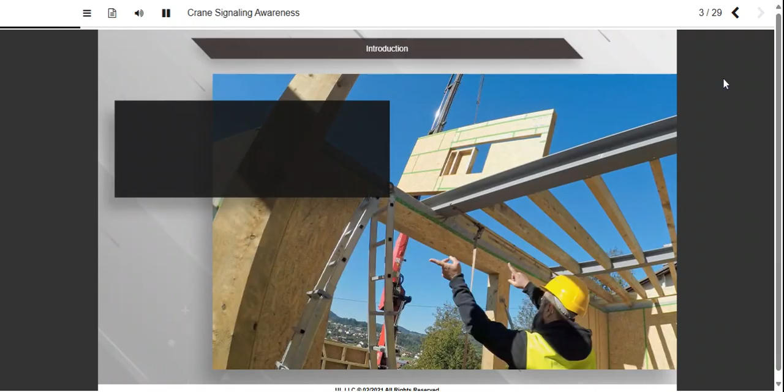Welcome to our course about crane signaling. Since you work around cranes, it's important that you know who crane signalers are, what they do, and why they are important to the safety of your worksite.

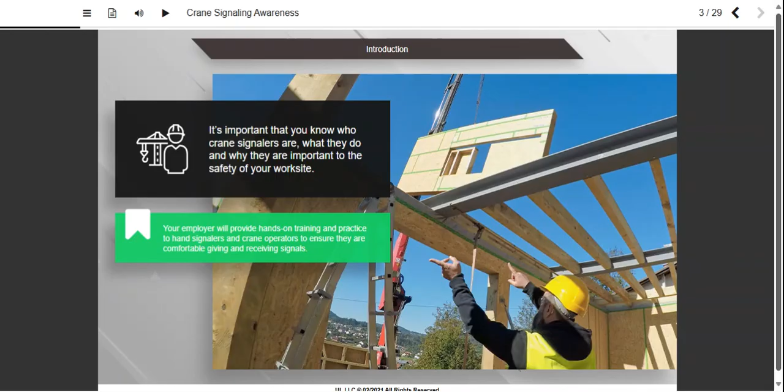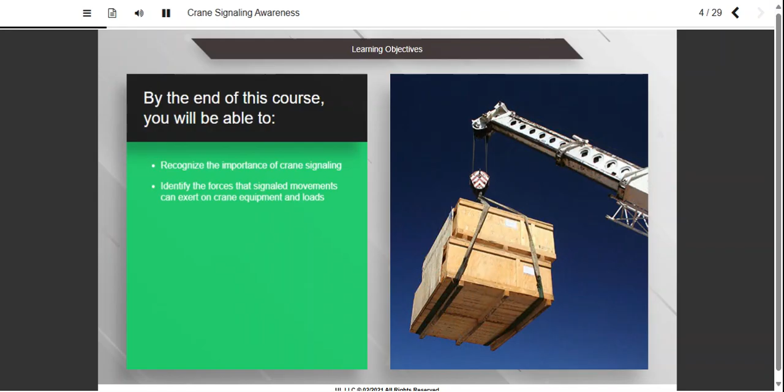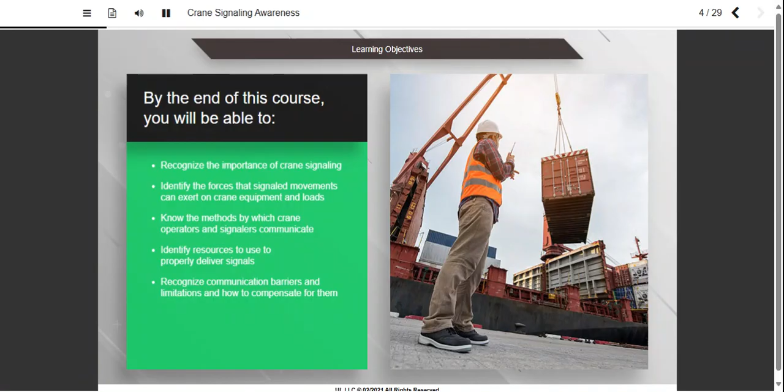By the end of this course, you will be able to recognize the importance of crane signaling, identify the forces that signaled movements can exert on crane equipment and loads, know the methods by which crane operators and signalers communicate, identify resources to use to properly deliver signals, recognize communication barriers and limitations and how to compensate for them, know all official signals for stop work, and know what to do if crane communication is unclear.

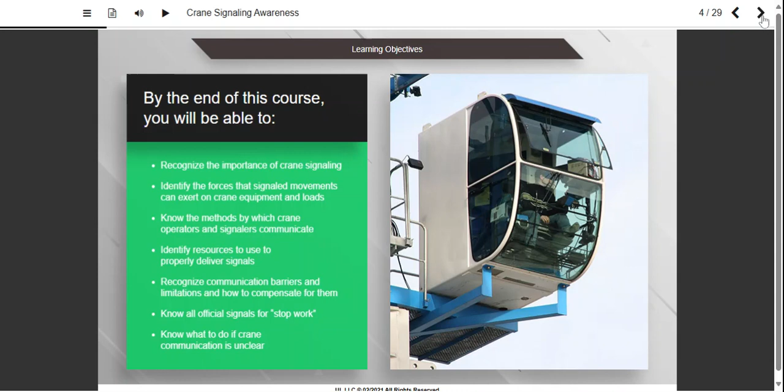Several people share responsibility for safe crane operation. The person directing lifting operations is the person ultimately responsible for the crane's work. This person is usually a supervisor, but may be the crane operator or signal person in some situations. You may hear people refer to this person as the lift director.

The crane operator is the person who manipulates the controls of the crane. The signal person guides crane movements using hand or voice signals. Only one person should give signals to a crane at a time. The exception is the emergency stop signal, which anyone on the site may give at any time.

There are things below, above, and around the crane that its operator may not be able to see as clearly as the signal person can. Crane signalers help crane operators set loads with precision while avoiding obstructions like buildings and overhead power lines. It's important to note that if the crane's boom contacts a structure or load, the boom can be damaged. A qualified person must inspect the boom prior to any additional work. This can be a life and death situation.

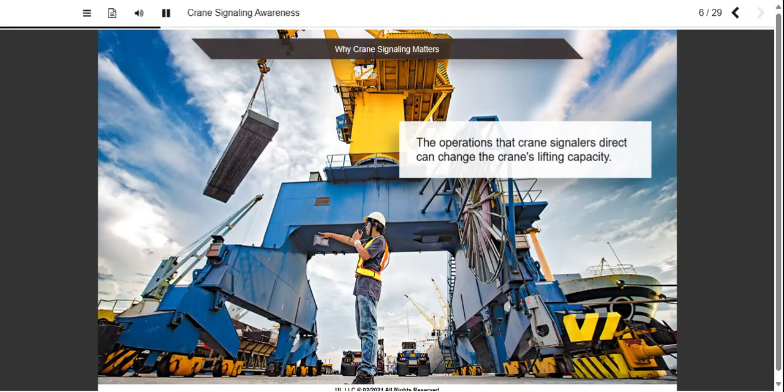The operations that crane signalers direct, such as boom length and radius, can affect crane capacity. Crane signalers receive important training about these effects so that they make safe choices. The lift director, crane operator, and crane signaler all work together to make sure people and property are safe during crane operations. Operating a crane safely truly is a team effort. The team should avoid distractions, such as chatting with other workers, and focus on the crane, load, and surroundings.

Who is responsible for making sure that a crane does not contact obstructions during its operation?

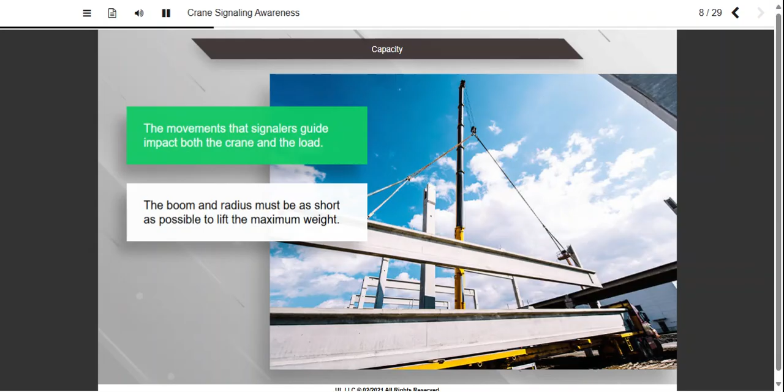The movements that signalers guide impact both the crane and the load. Crane capacity is influenced by the position, boom length, and radius. The boom and radius must be as short as possible to lift the maximum weight. Changing the crane position and extending the boom length or radius will decrease the capacity of the crane. For this reason, cranes are seldom able to lift their maximum capacity.

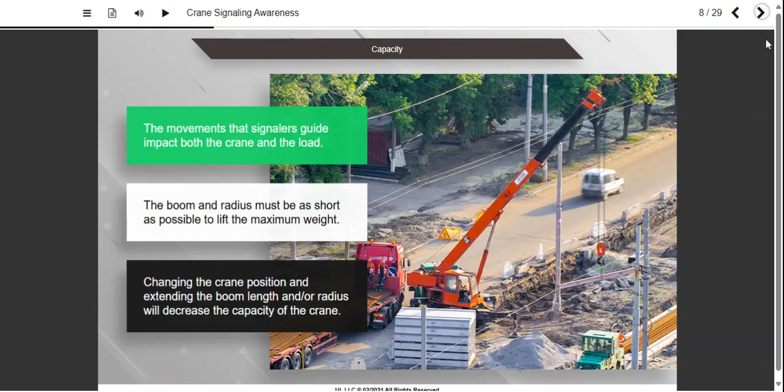Moving a load increases the force and burden on a crane. Dynamic loading is how we describe the effect the speed and weight of a load has on the time it takes to stop it. Heavy loads moving quickly take more time to stop than light loads that are moving slowly. The heavier or faster the load, the more time signalers need to give operators to bring the load to a stop. In other words, signalers must give advance notice so that operators may stop loads gradually and safely.

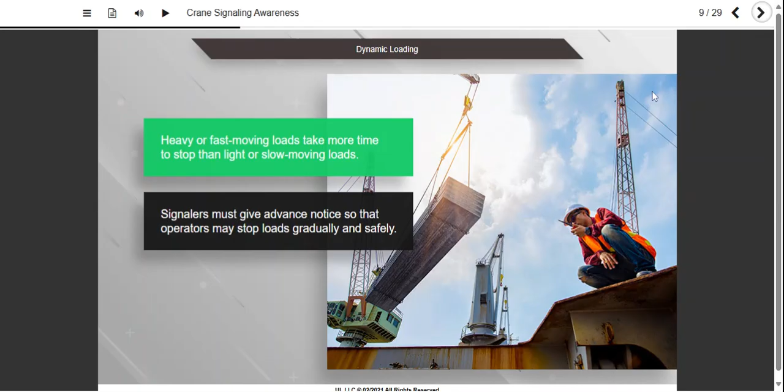If two loads are moving in the same way and at the same speed, which one will take longer to stop?

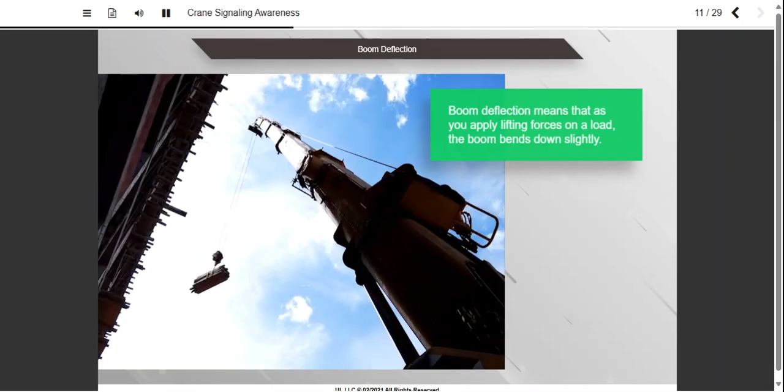Boom deflection simply means that as you apply lifting forces on a load, the boom bends down slightly. So signal people need to account for the fact that the load won't leave the ground as soon as the crane starts to lift. The rigging must become pulled tight, and the boom must deflect completely before the load leaves the ground. When lowering the load, the signaler must ensure that the load is completely settled and there is no remaining boom deflection before it's safe to detach the load.

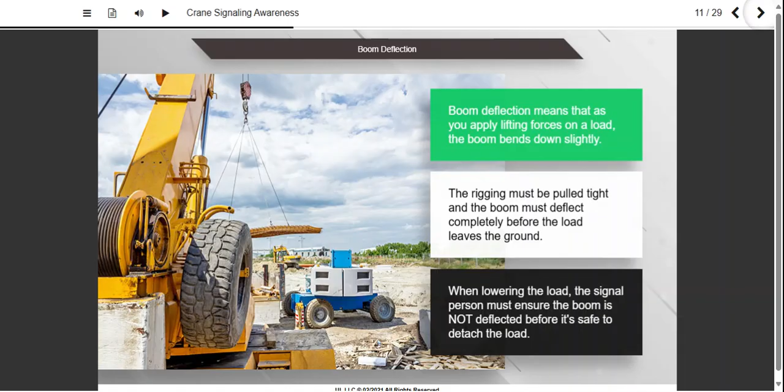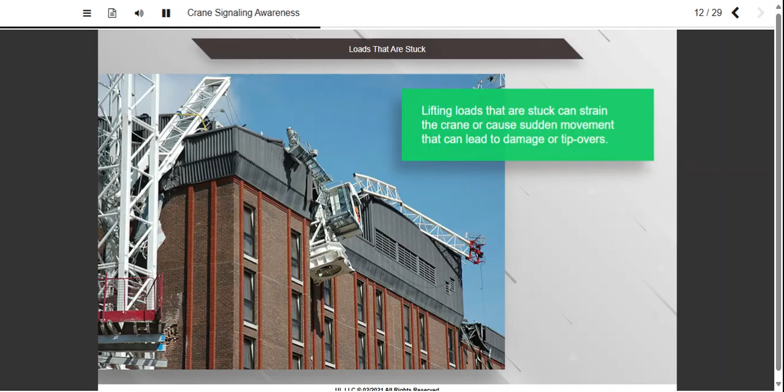Loads that are stuck can cause several problems for crane operations. Trying to lift loads to release them can strain the crane. If they release quickly, the load can jump or move suddenly. These situations can cause serious damage or tipovers. For these reasons, it's important that signalers let crane operators know when they are trying to lift a stuck load so that the operator knows what to expect.

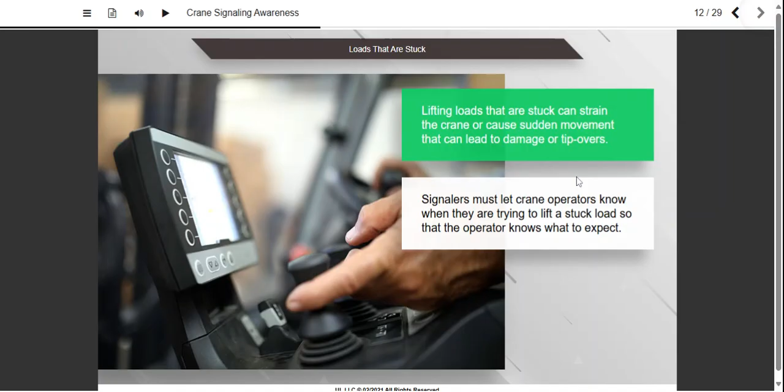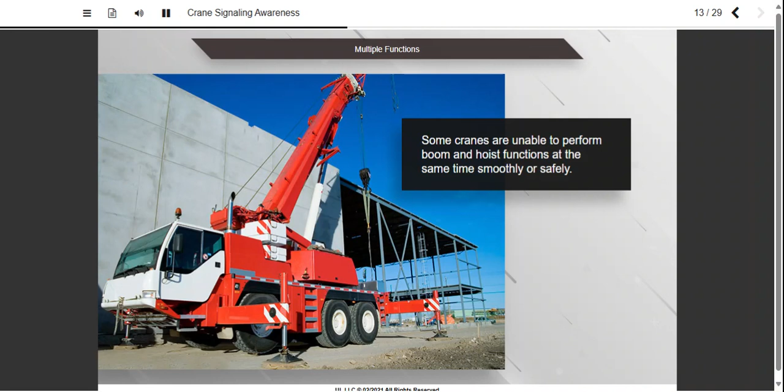Some cranes are unable to perform boom and hoist functions at the same time smoothly or safely. The signaler and operator must meet prior to lifts to talk about equipment limitations and plan accordingly.

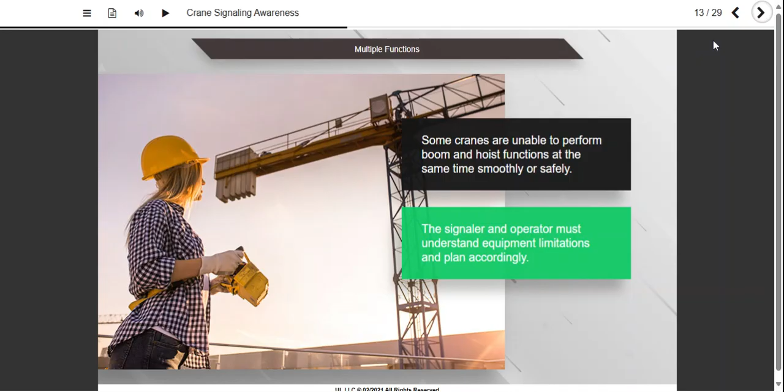Two blocking is a term that describes a crane accident that occurs when the headache ball or hook block contacts the boom tip. Two blocking accidents can be deadly and are most common on telescopic boom cranes. Signalers and operators should be aware of this issue, especially when telescoping the boom.

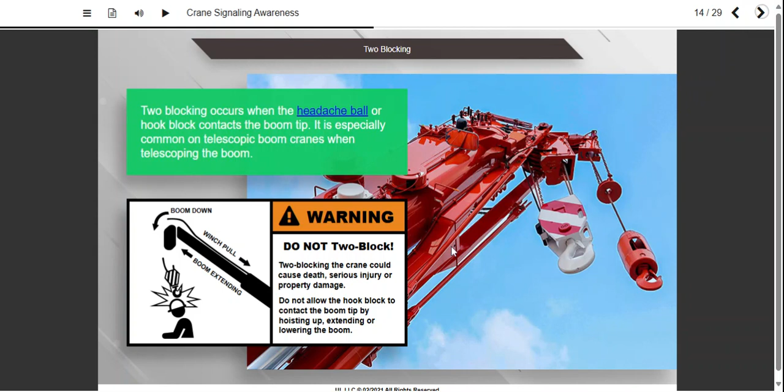Side load occurs when the center of gravity of a load is not directly under the crane hoist. Crane booms are only designed for a side load of 2 or 3%. Exceeding this amount can stress the boom to the point of collapse. Signalers must make sure that cranes lift loads straight up. They should never signal the crane operator to do anything with the crane that would cause a side load.

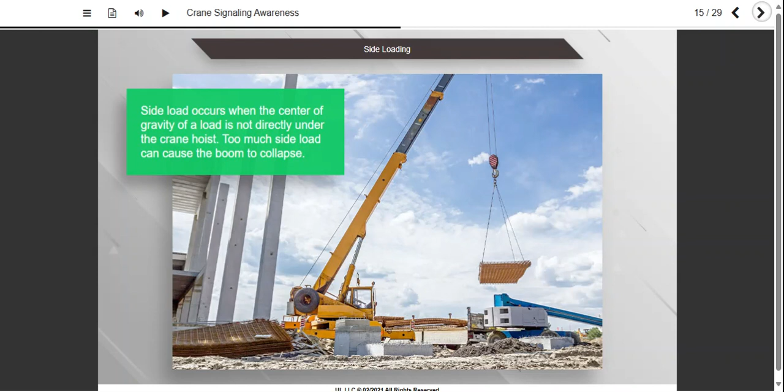Because of boom deflection, operators and signalers should anticipate that the boom will do what when they begin applying lifting forces on a load?

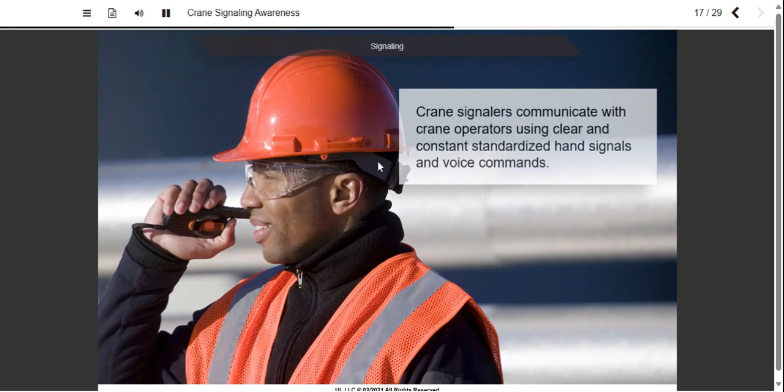Crane signalers communicate with crane operators using clear and constant standardized hand signals and voice commands. Regardless of the communication method, it's vital that everyone meets prior to the work beginning. At the meeting, everyone must agree upon and understand the work plan, hazards, equipment capabilities and limitations, roles, and signals and commands.

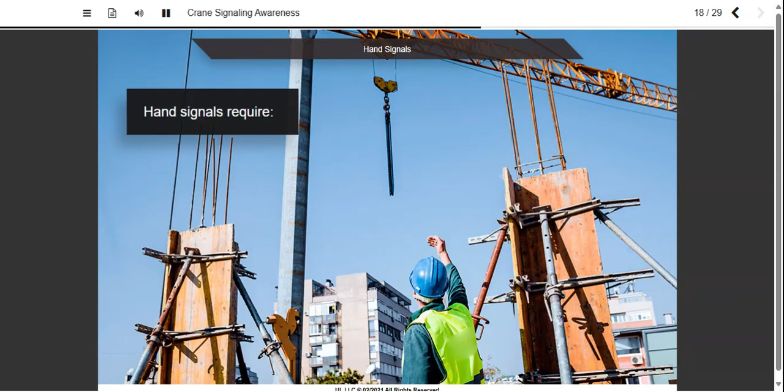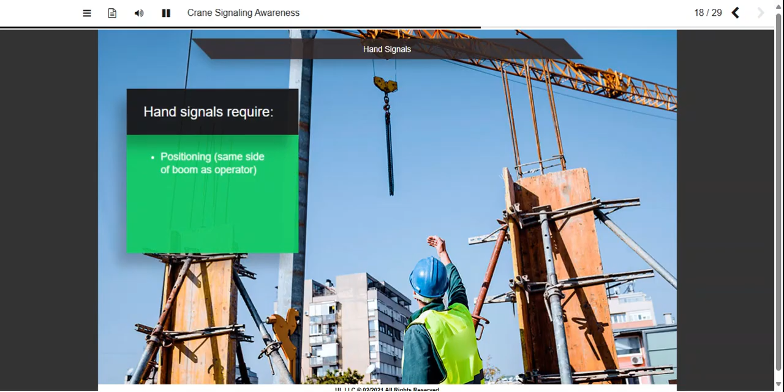Hand signals only work with adequate visibility. This means that the signaler must be positioned where the operator can see him or her. Usually, this means that the signaler is on the same side of the boom as the operator and within easy eyesight. The signaler and operator must also consider visibility factors, like weather and light, to make sure they can see each other. It is important that signal persons deliver standardized signals.

There is a chart that the signaler will use to ensure accurate signals. The lift director, crane operator, and crane signaler may take time during the pre-work meeting to rehearse and ensure clear understanding of signals. Communication is key to safe crane operations. It is vital that anytime the operator cannot see or understand the signaler, work stops immediately.

Voice signals are another method by which a signaler delivers commands to a crane operator. They are particularly useful for tower and mobile cranes. Before work begins, the team must test the voice system they will use to make sure it is clear, reliable, and has a dedicated channel to avoid interference with communications or inadvertently detonating remote explosives. The operator must be able to receive and respond to voice commands without using his or her hands.

The signaler must speak clearly, slowly, and calmly, and should deliberately use specific wording in a specific order, which we will discuss momentarily. The signaler should give directions such as right and left from the operator's perspective.

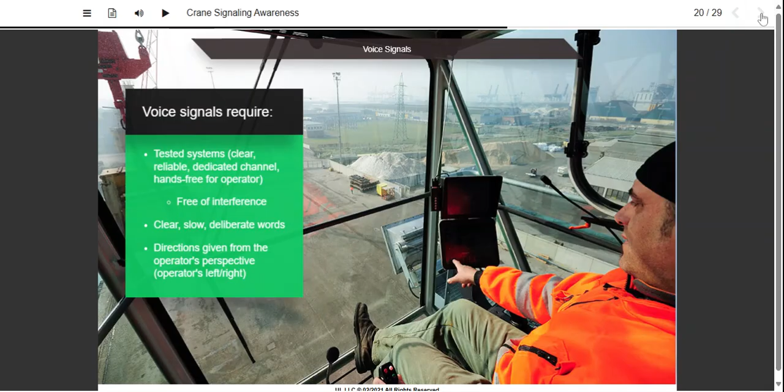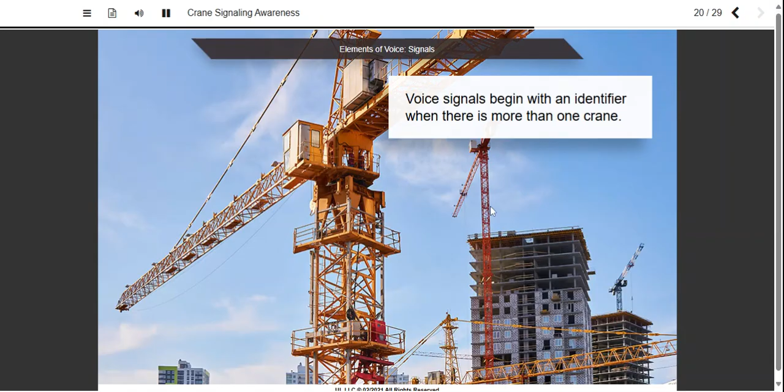Voice signals begin with an identifier when there is more than one crane. For example, a signaler may preface a command with the operator's name, a crane number, or the location, such as North Crane. Then the signaler must deliver a complete voice command in a standard order. The command begins with the function and direction, such as load up, swing right, or boom down.

This is followed by the distance and/or speed, such as swing right 10 meters, 5 meters, 4, 3, 2, 1. The voice command concludes with the function stop. For example, load stop or boom stop. Which of the following is an appropriate voice signal for a job with a single crane?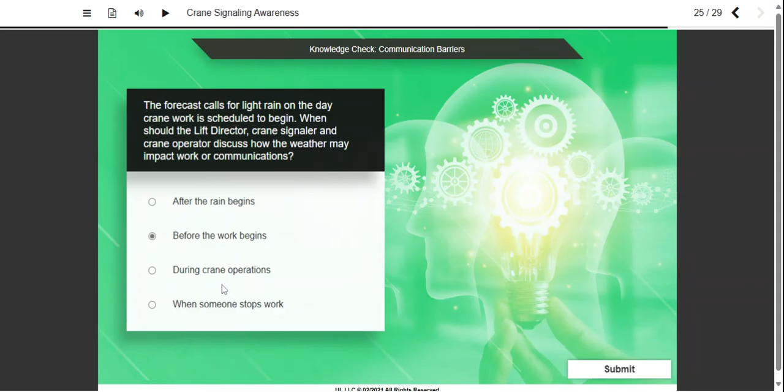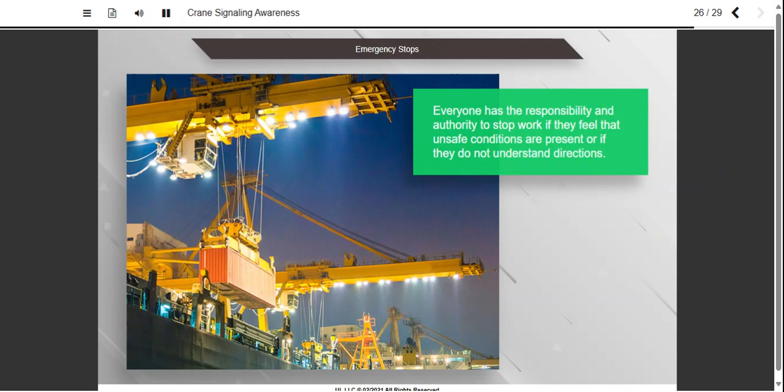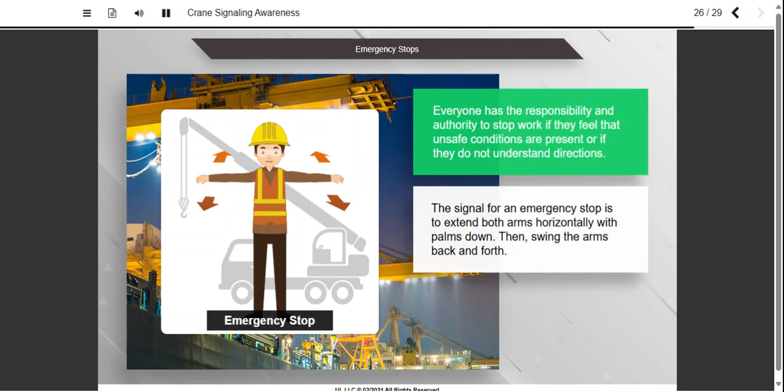Everyone on a job site has the responsibility and authority to stop work if they feel that unsafe conditions are present or if they do not understand directions. This is especially important for crane operations because of the degree of danger involved to people and property when things go wrong. The signal for an emergency stop is to extend both arms horizontally with palms down. Then swing the arms back and forth. The voice and hand signals for stops and emergency stops should be part of the pre-work briefing.

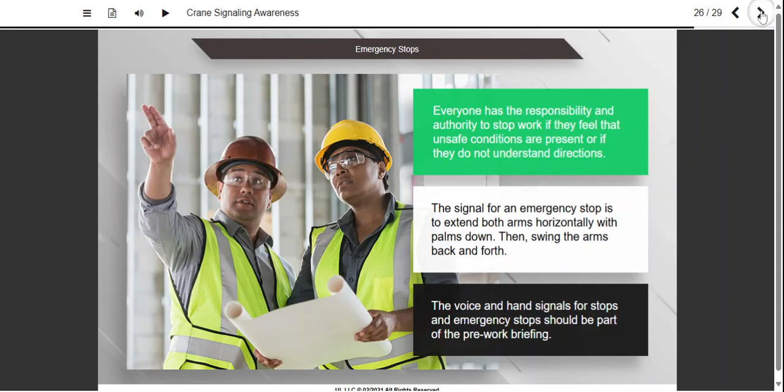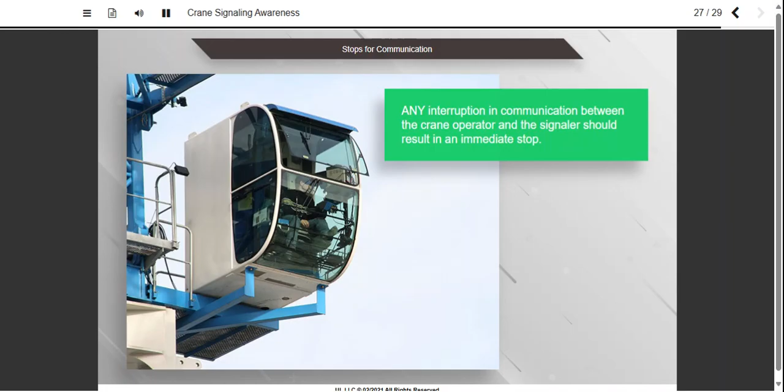Communication between the crane operator and the signal person is continuous during all crane movements. Any interruption should cause the operator to stop all crane movements. Movement may only resume when the signaler is able to give a proper signal that the operator understands. If the operator has any concerns regarding the requested movement or needs to communicate with the signal person, he or she should stop all crane movement until the issue is resolved.

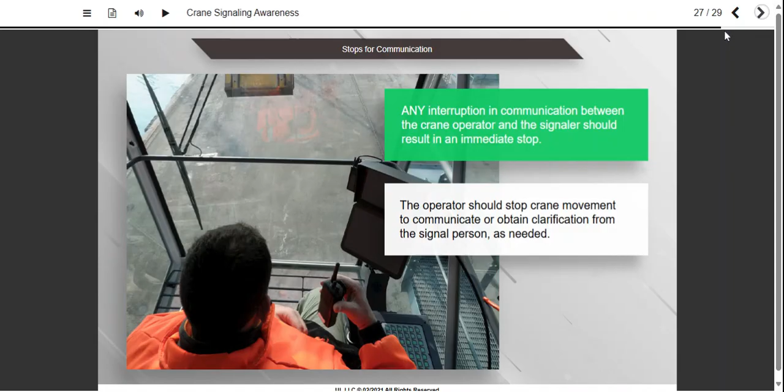A crane operator briefly loses sight of the hand signaler, but feels confident about what to do next. Should the operator stop work?

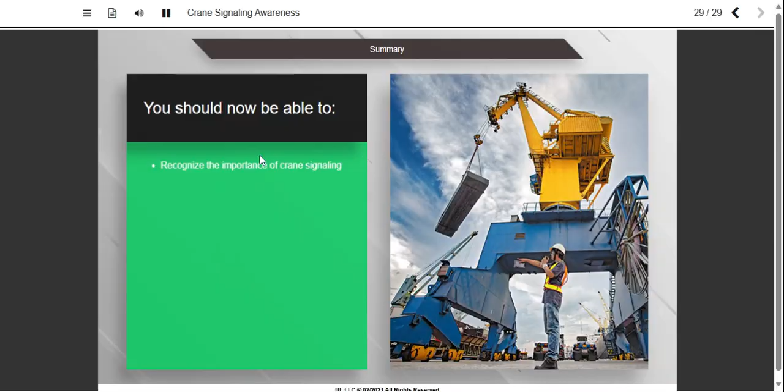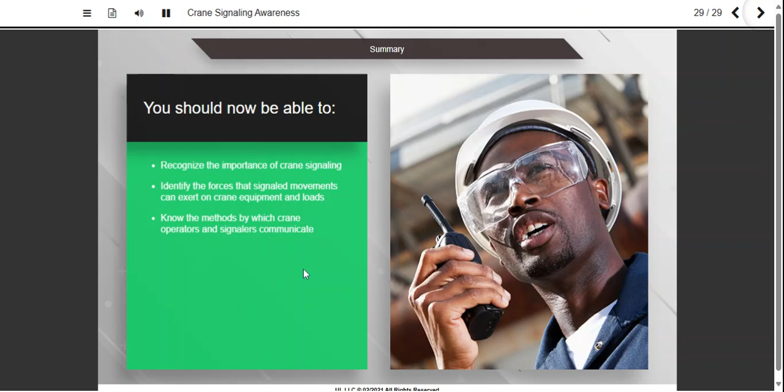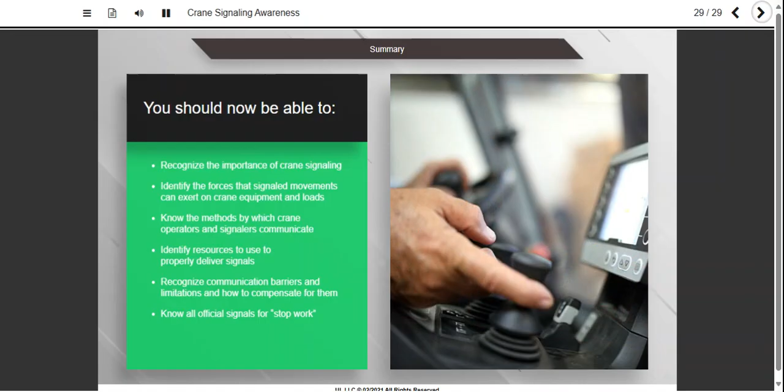You should now be able to recognize the importance of crane signaling, identify the forces that signaled movements can exert on crane equipment and loads, know the methods by which crane operators and signalers communicate, identify resources to use to properly deliver signals, recognize communication barriers and limitations and how to compensate for them, know all official signals for stop work, and know what to do if crane communication is unclear.